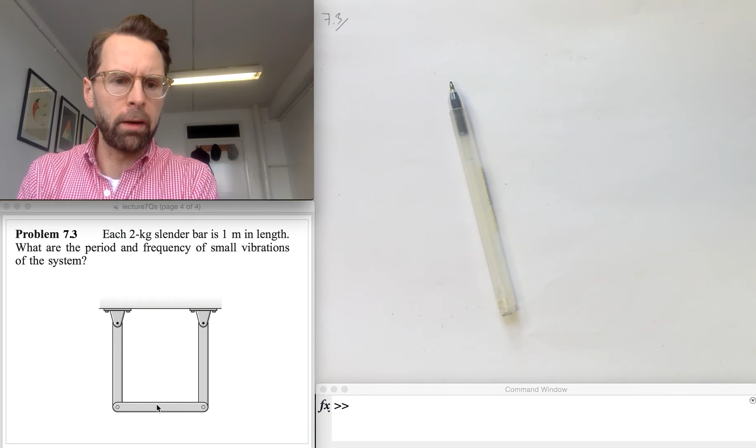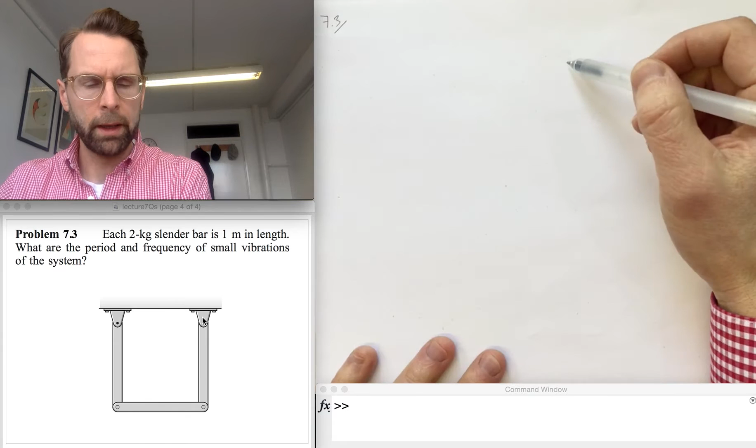In 7.3, we're asked to find the period and frequency of small vibrations of this system. These bars are all the same length and all the same mass. They're 2 kilograms each. And one of the key words in this question is small. We're looking for small oscillations, really, of this system. We're looking at the natural frequency.

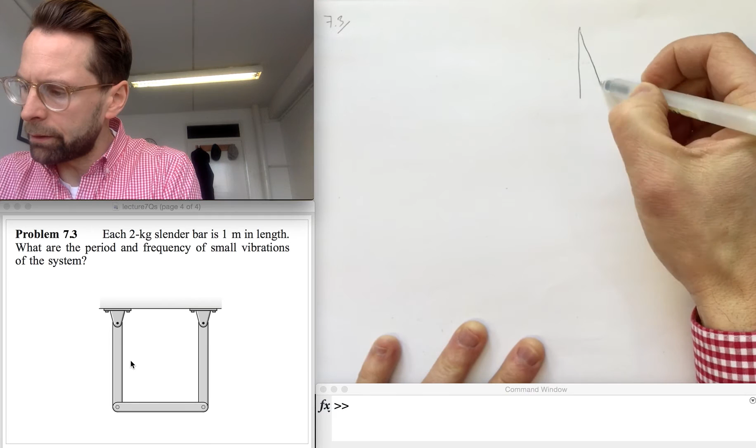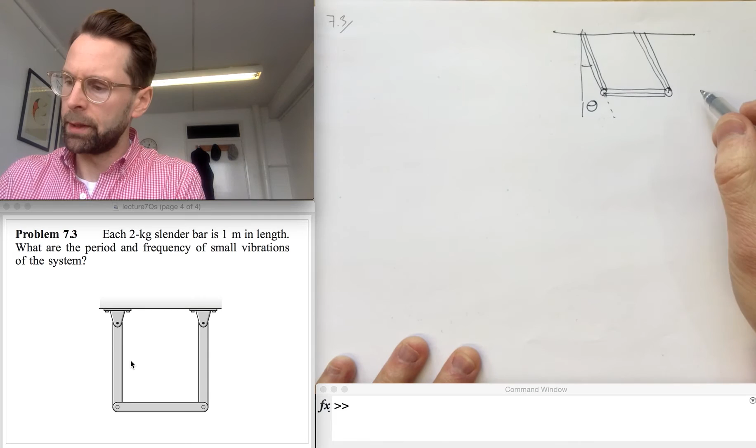So if I draw a little sketch, that's the vertical, and this is some perturbation away from that. And this is theta. And theta is small, and that means that we can use, and we'll use this later, our small angle approximation. So a small angle approximation that we're going to use is that cos theta is approximately equal to 1 minus theta squared over 2.

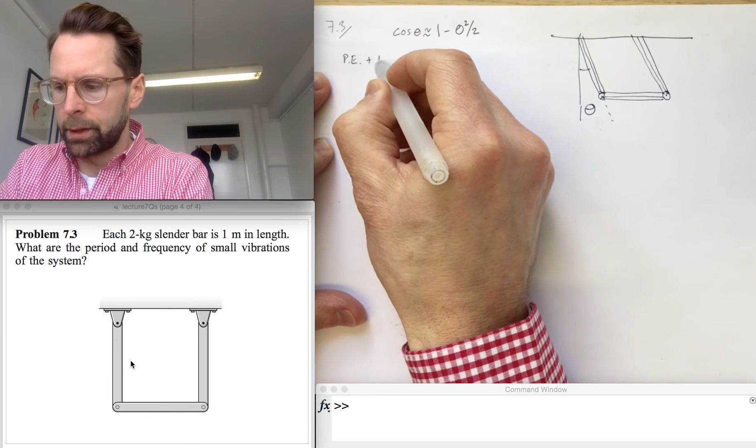Okay, so we're going to start by noting that only conservative forces are acting, so we can analyse this system with potential energy plus the kinetic energy is equal to a constant, and we're going to just add up our various components of potential energy and kinetic energy. So I'm going to label the bars 1, 2 and 3.

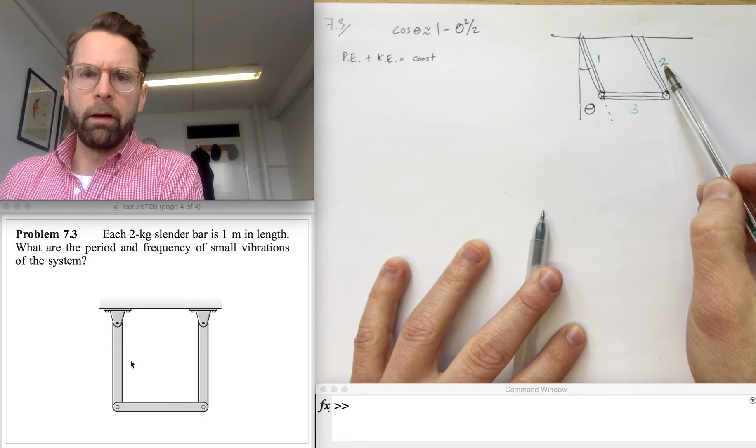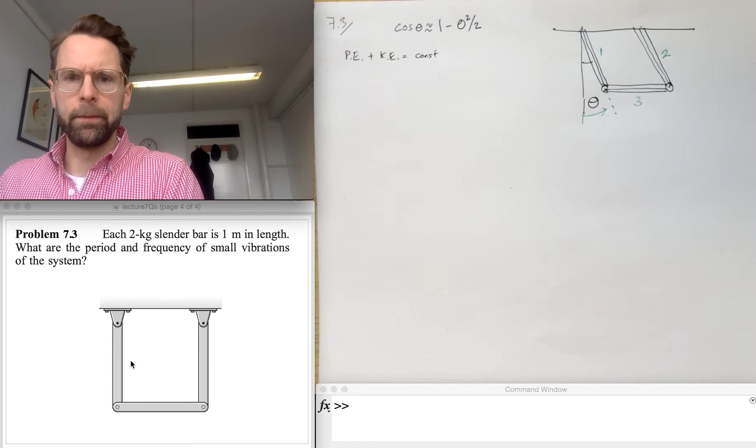Bars 1 and 2 are in a fixed axis rotation around this point, whereas bar 3 is in translation. There's no rotation, it sort of goes like that, whereas bars 1 and 2 do that. So the whole thing swings outwards, like so. So let's firstly work out what the potential energy of bar 1 is.

And to do that, we'll need to work out what the elevation of the centre of mass is. Now each bar has a length L, and so the centre of mass is going to be L over 2 along, assuming that they're a constant density and uniform. So those are the positions of the centre of masses. So that length there, that is L over 2.

So the elevation of the centre of mass of 1, and I'll call it H1, the elevation above its equilibrium position, and this is just a bit of trigonometry, is L over 2 minus L over 2 cos theta. And I can just reassure you that that's the case by doing a little close-up. So that's the centre of mass. This is the distance L over 2. This is theta. And that's its initial position.

So this length here is L over 2 times cos theta. And this distance here is L over 2. So that distance there, which is the elevation, is L over 2 minus L over 2 cos theta, which is what we've got here.

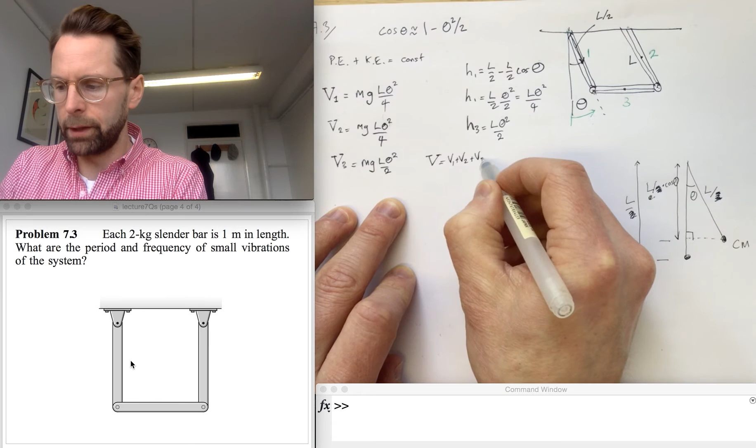So our potential energy is mgL theta squared over 2. And our total potential energy, which we'll need later, which is a sum V1 plus V2 plus V3, is equal to mgL theta squared. So nice and simple. So that's evaluating the potential energy. Now we can evaluate the kinetic energy.

So the kinetic energy of a rotating bar in fixed axis rotation around this point is half I, where I is the moment of inertia of the bar around its endpoint, times theta dot squared, where theta dot is the angular velocity. So I, which wasn't given in the question and would be given if this were an exam question, because we don't expect you to remember these off the top of your head, is a third of the mass of the bar times L squared, and that's theta dot squared. So that's 1 over 6 mL squared theta dot squared.

And the kinetic energy of this one is exactly the same, 1 over 6 mL squared theta dot squared. So now the only thing we need to calculate left is the kinetic energy of bar 3, and the speed of the centre of mass of bar 3 is going to be equal to the angular velocity of this link multiplied by its length. It's the tangential velocity. So the speed, let's write it here, is equal to theta dot times L. So now we can just use our standard expression for kinetic energy, half mv squared equals half m. Now we make that substitution, theta dot squared L squared.

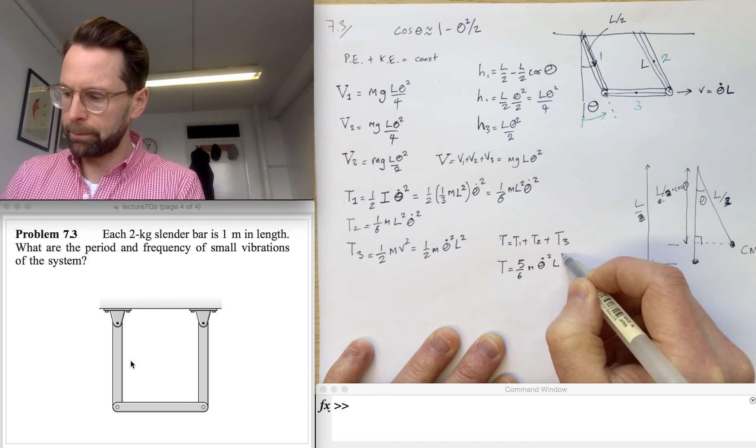So our total kinetic energy is T1 plus T2 plus T3. We're adding that to that to that, and that gives us 5 over 6 m theta dot squared L squared. Okay, so we are almost there. We've now got to add our potential energy to our kinetic energy, and I'm going to do that. So we've got mgL theta squared plus the kinetic energy, which is 5 over 6 m theta dot squared L squared, is a constant. Now I'm going to differentiate that with respect to time.

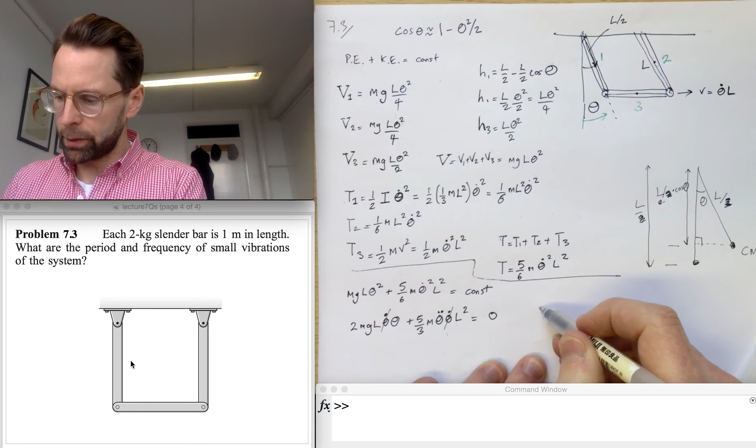What I'm going to get is 2mgL theta dot theta plus 5 over 3 m theta double dot theta dot L squared equals 0. Now I can divide through by theta dot, and we'll get a governing equation which looks like this: theta double dot 5 over 6. Also the m's look like they divide through as well. 5 over 6 times L squared plus gL theta equals 0, and I can divide through by L as well there to leave us with 5 over 6 L theta double dot plus g theta. And that's our governing equation.

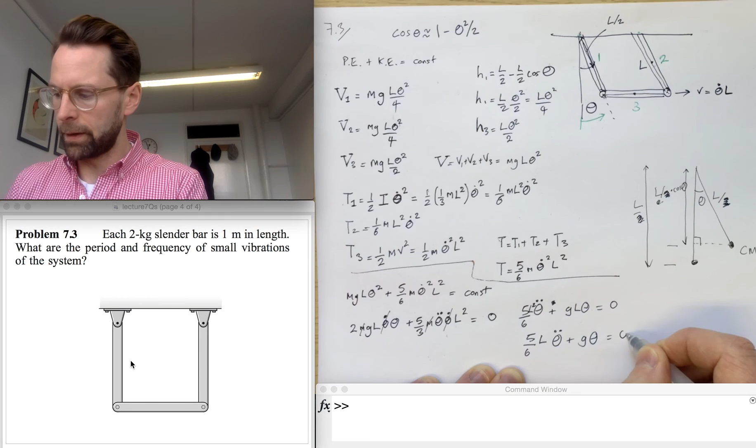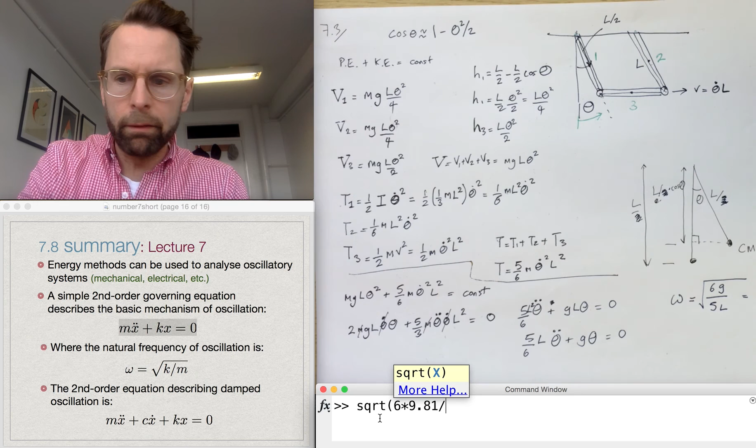And if we go to our lecture notes, we can recognise that it's in this form. And so that means our angular frequency, our natural frequency of oscillation, is the square root of this term divided by this term. So that's g times 6 over 5L. And I've lost m somewhere. No, I think that's okay. So that's the square root of 6 times 9.81 over 5 times, I think the lengths of the links are 1 meter. So that gives us an angular frequency of 3.43 radians per second.

And if we want that in hertz, we divide it by 2 pi. And 1 over that gives us the period. So period equals 1.83 seconds. So there we go. We established in the end that the frequency didn't depend on mass, and I was a bit surprised about that to begin with. But if you remember that a pendulum's frequency isn't affected by mass, and essentially this is just a pendulum, so that all makes sense. Okay.